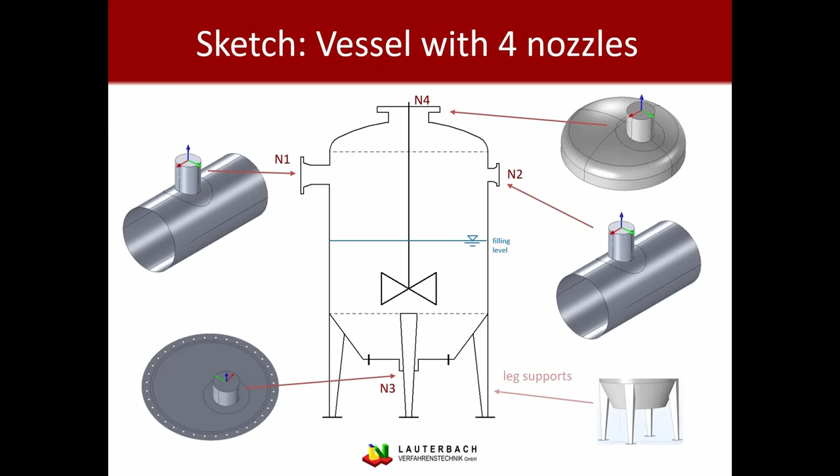Our task is to calculate if these nozzles and vessels are strong enough to withstand the mechanical stresses. There are forces and moments applied at every single nozzle, and we want to find out if the material, the nozzles, and the vessel itself withstand those stresses.

To calculate this, we will start by entering all data in the module. We will open one module per nozzle, so in our case 4 modules in general. We will start the calculation interface. We will perform the automatic and simplified calculation, and our result, our output, will be the calculation of the stresses and loads applied to the nozzles and the container.

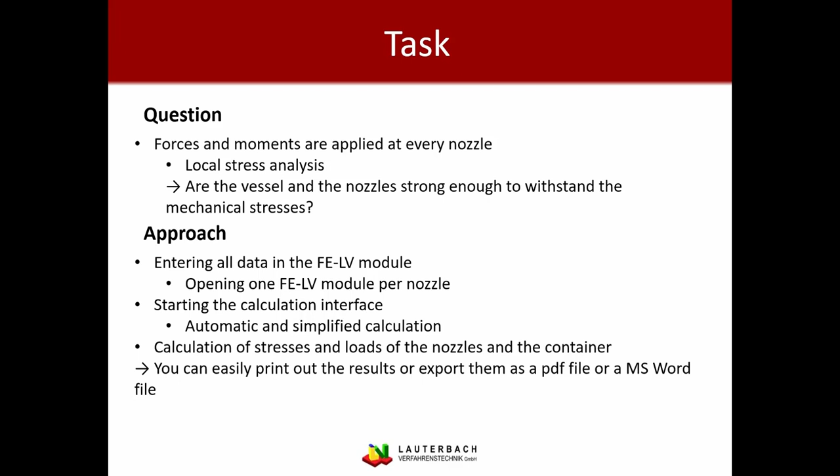I also want to mention that it is very easy to print out the results of the calculation, or export them as a PDF file or as a Microsoft Word file.

This is the general overview of our whole interface. On the left side you can see the list of modules. On the right side you can see the module itself, where you can enter all your data.

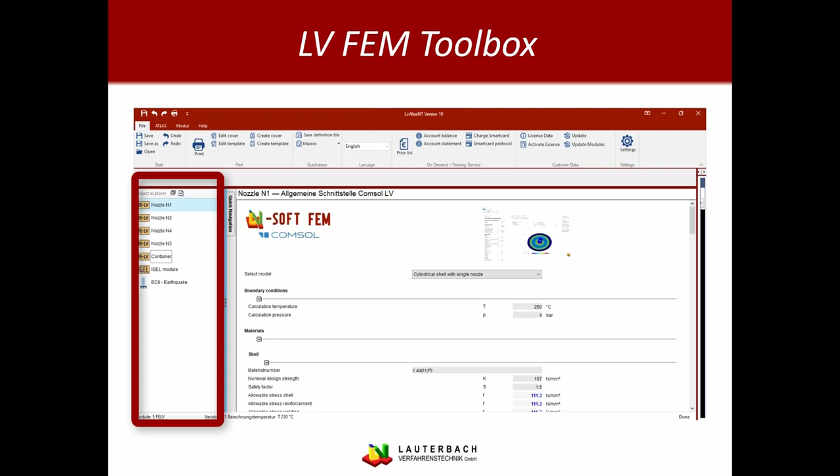First of all, you have to select a model, for example a spherical dished head, a flat head, or a vessel with leg support. In this example, I chose the cylindrical shell with a single nozzle.

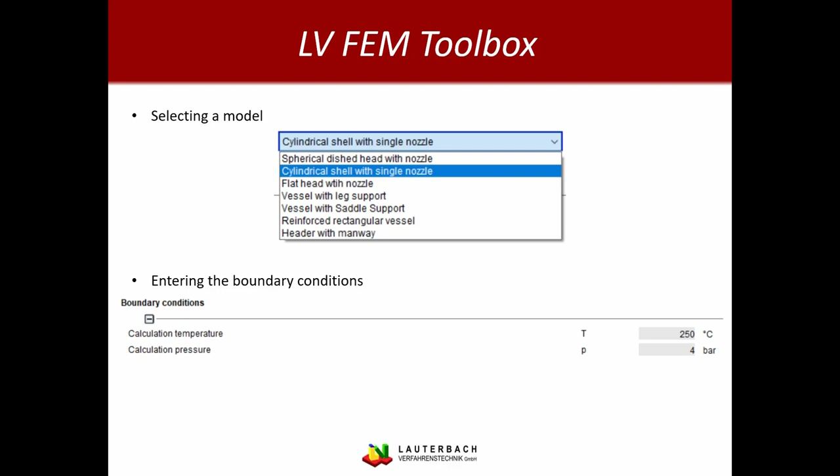We enter our boundary conditions, so temperature and pressure. We will select the materials of the vessel and the particular nozzle we're looking at. Then we enter all the geometrical data of the shell and the nozzle.

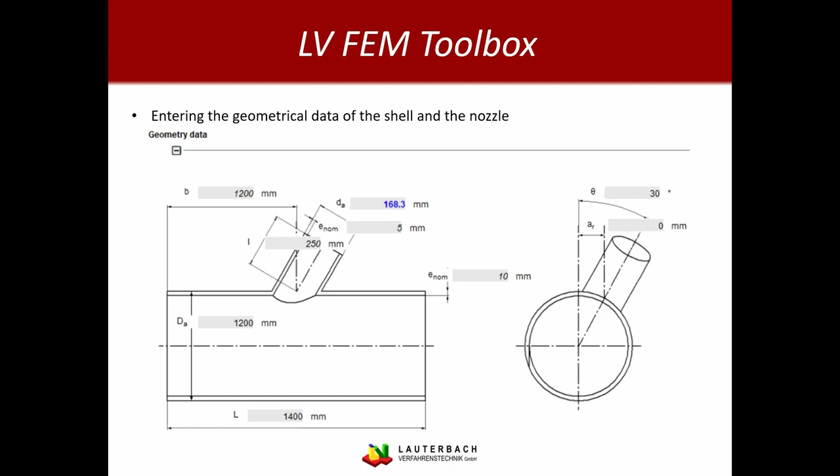Optionally, you can choose a nozzle reinforcement, and if you choose a reinforcement, you can enter the thickness or the diameter of the reinforcement.

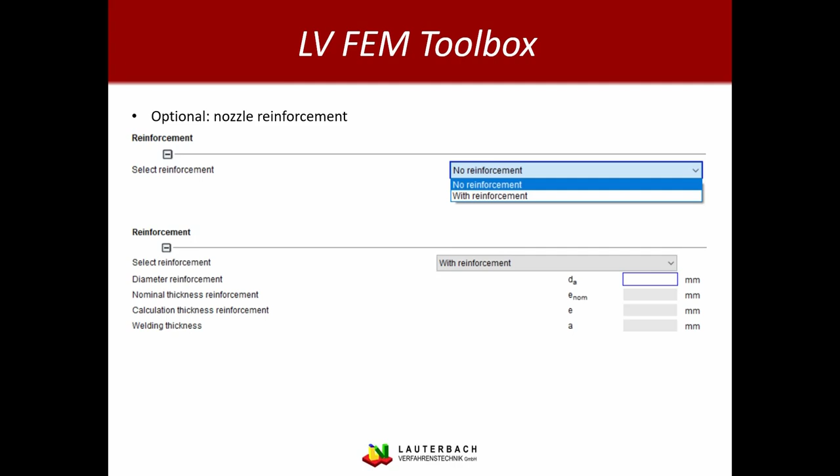You also have the choice to choose where forces and torques are applied, at the end of the nozzle or at the connection between nozzle and shell. In this case, the shell is the cylinder.

You have another option: you can consider or not consider the internal pressure of the shell, in our case the vessel.

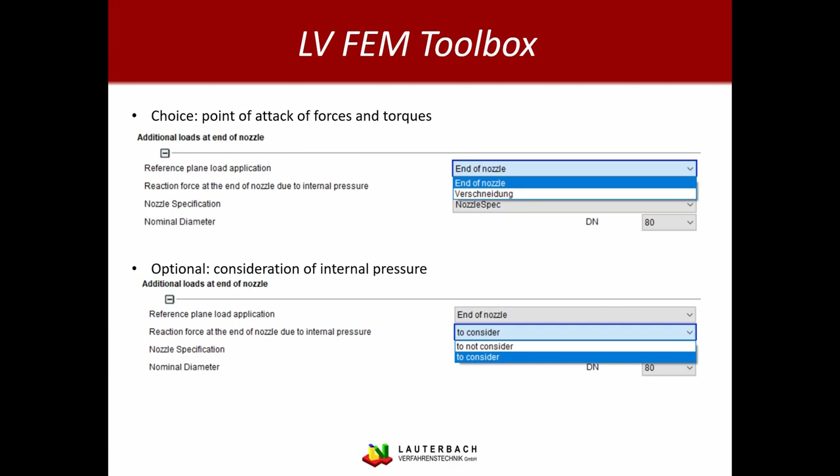You can enter the forces and torques according to nozzle spec, or you can enter them yourselves, putting them in freely if you want to. You can also choose the diameter for nozzle spec if you choose to define the forces and torques by nozzle spec.

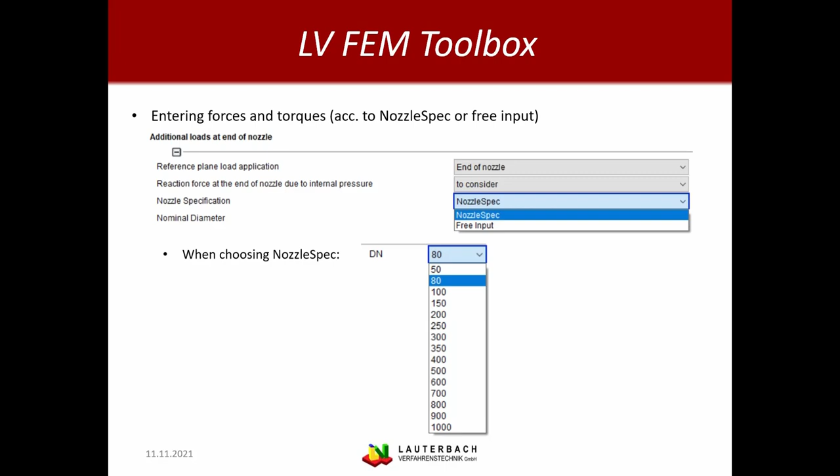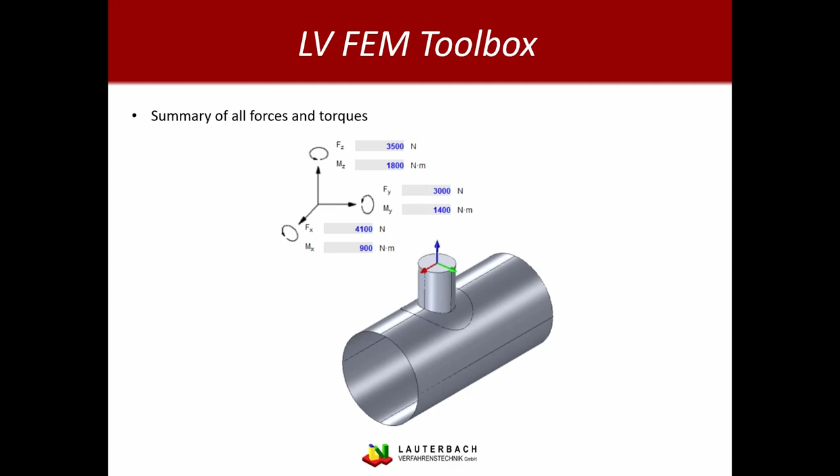At the end of the module you get a summary of all the forces and torques applied to the nozzle. By simply clicking the Start Comsol button in the top left corner, you can start the calculation interface.

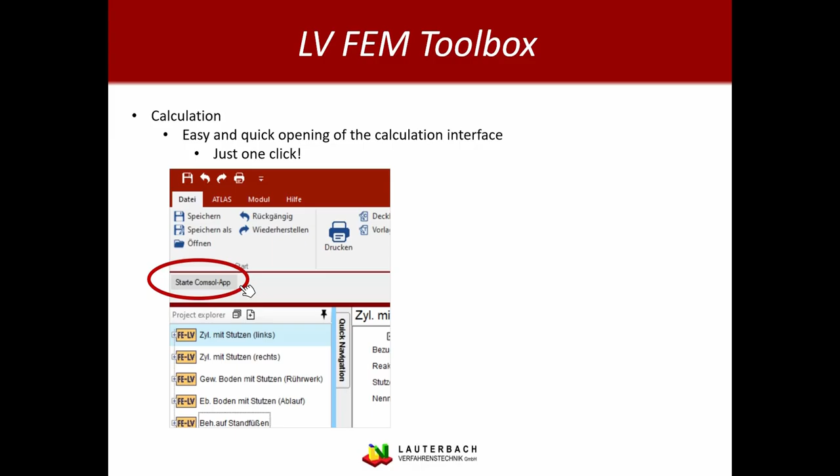So here you can have a look at the calculation interface. You can access it by clicking on the Start Comsol app button in the FELV module.

On the left side you can see all the data you put into the module: temperature, pressure, E-moduli of the materials of the nozzle and the shell, the forces and torques, and at last the net parameters.

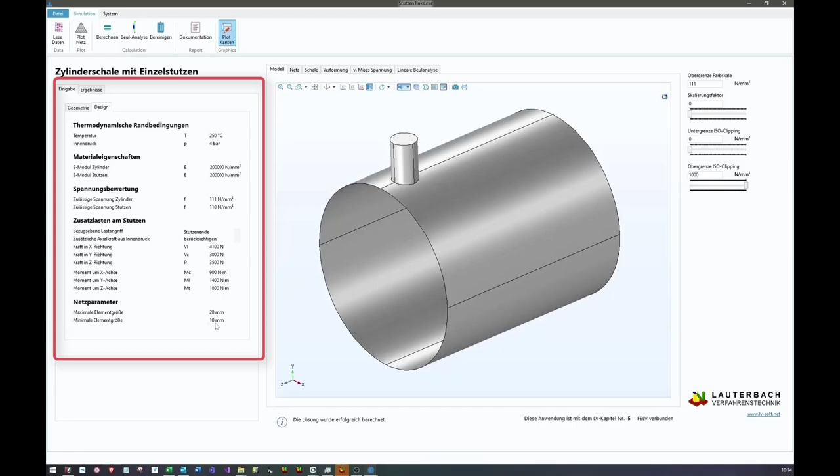This is where you can always check the data you put in the module. You can also have a look at the net.

You can zoom in, you can zoom out, and you can also turn the model around to look at it from different views.

You can look at the deformation, the tensions, and in which areas the tensions are especially strong. You can also have an isolated look at the tensions in the decay area.

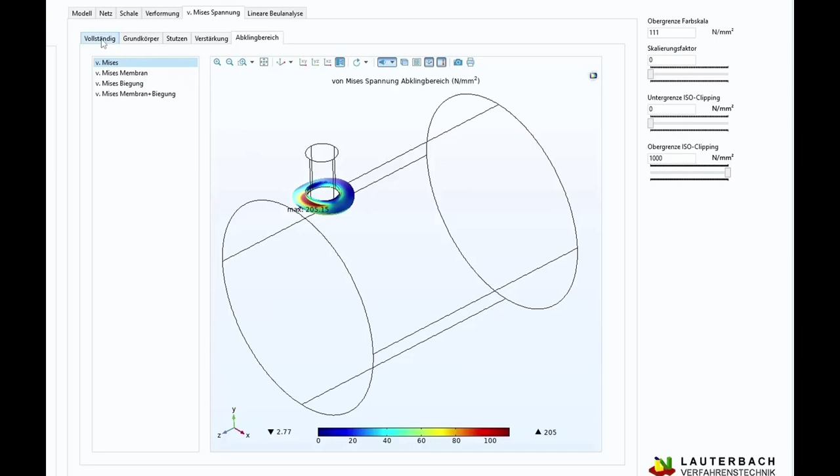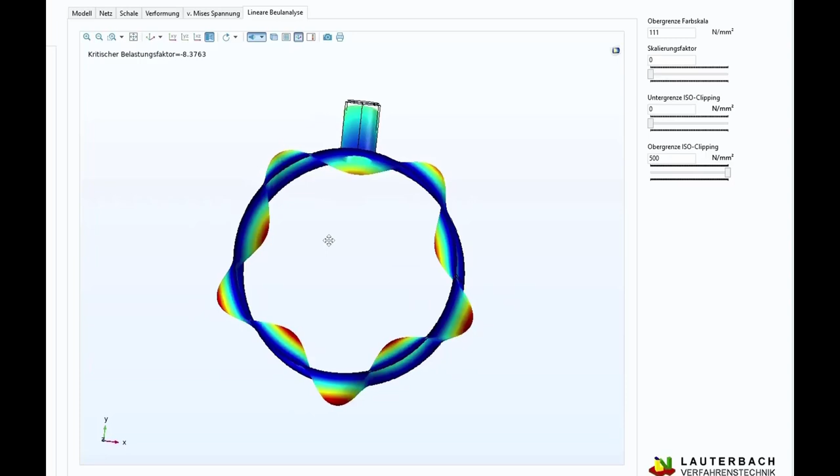You also have the option to perform a linear buckling analysis. You can turn the model, zoom in or zoom out as well. This way you can see where the deformation is especially strong, and you can see the critical load factor.

The next model we'd like to show you is the flathead. You can also turn the model around, zoom in, zoom out. You can also have a look at the net, at the shell.

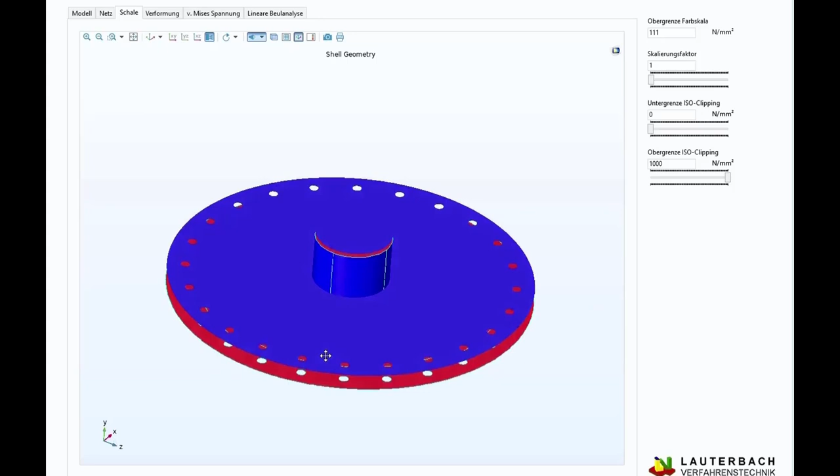On the right side, you have the option to, for example, adjust the maximum of the colored scale that you can see when we click the stresses.

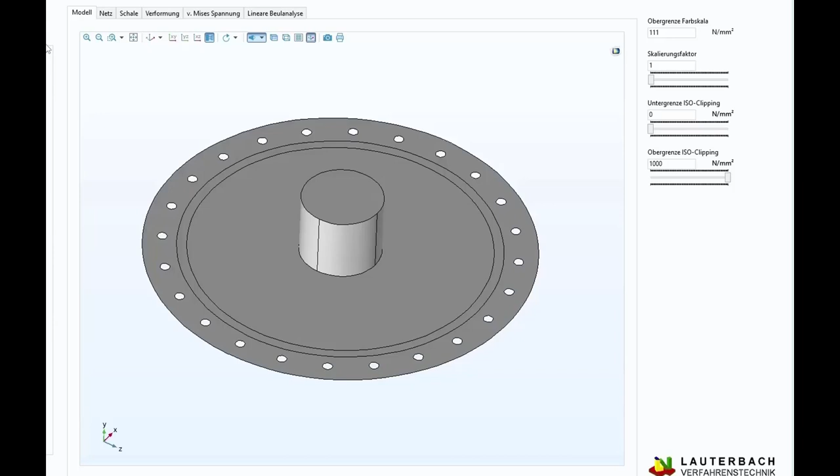You can also have a look at the deformation and the stresses, with isolated looks at different parts of the model: just the shell, just the nozzle, or optionally just the reinforcement if we had put in a reinforcement in the model.

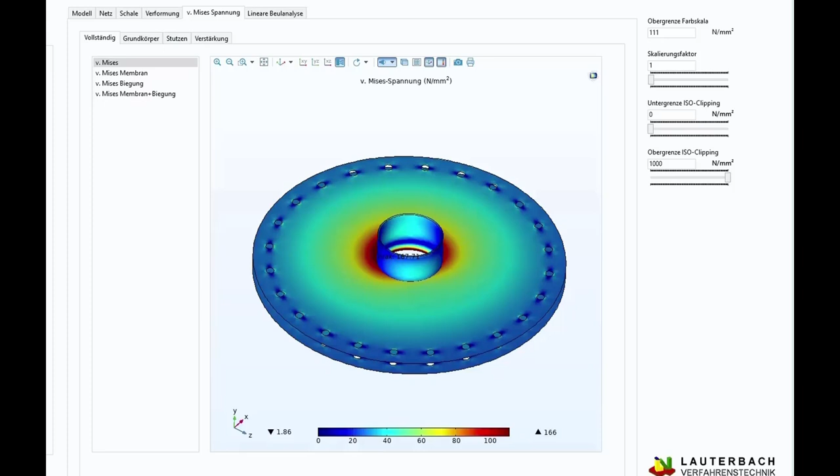The third model we'd like to show you is the dished head. You can also turn the model around, zoom in, zoom out.

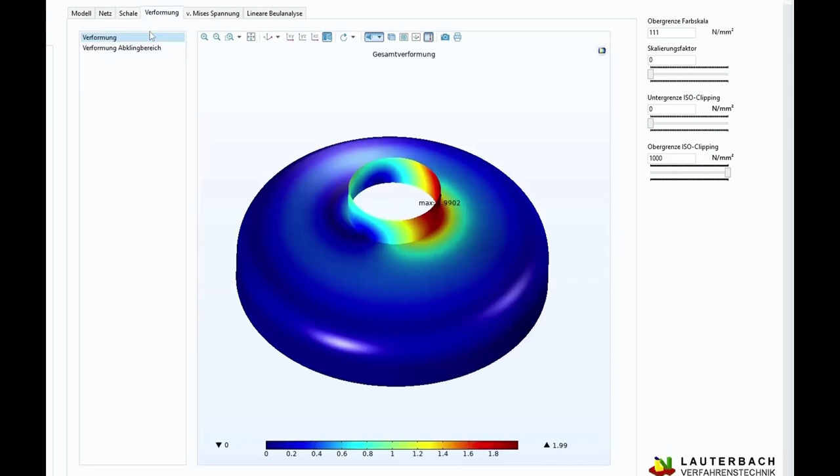Again, the same options on the right side. You can also have a look at the net here, at the shell, and at the deformation. You can have an isolated look at the deformation in the decay area.

You can have a look at the Mises stresses, again at different parts and areas of the whole model. You can show or hide the outer lines of the model.

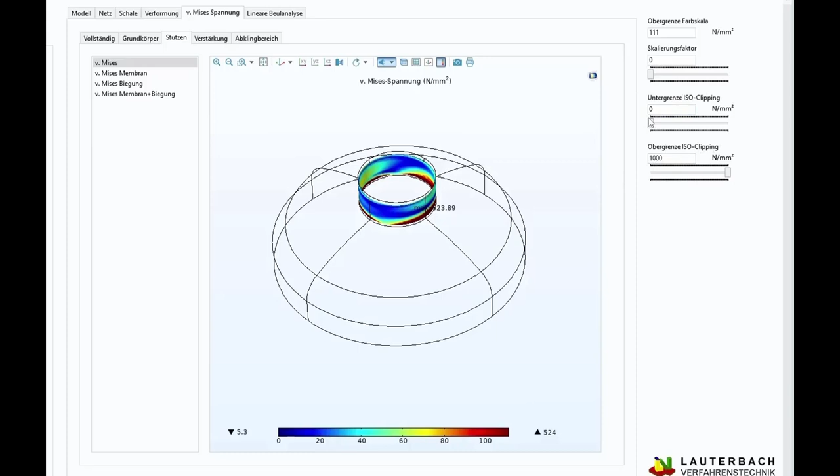On the right side, you can, for example, set the lower boundary of the ISO clipping to 80 newtons per square millimeter, which means only stresses over 80 newtons per square millimeter will be shown. And here again you have the model.